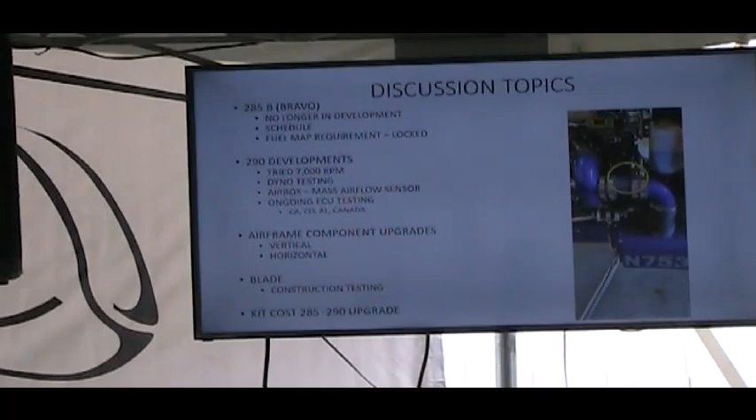Everybody probably knows, but if you're new, the new ECU system has Bluetooth capabilities. So your buddy can sit there and watch all of your flight data on his phone while you're out there screwing around if you want. It's pretty cool, the stuff it's capable of doing. And it has a total of, I'm always forgetting, about 20 channels on that. I think it's somewhere around 20, there's 20 capable channels. We don't use all of them now, so if you wanted to add other things, you can actually run those through that ECU.

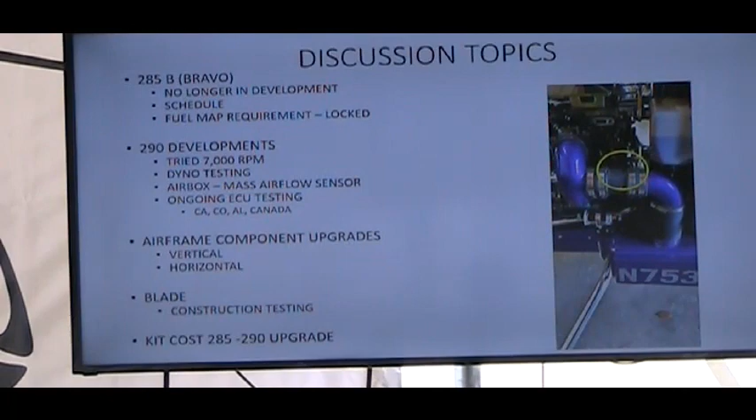For instance, say you want to know what your fuel pressure is all the time. You can put a fuel sensor in there, run it through that ECU system, and it'll come up on your dash panel. So there's several things like that you can add to it and monitor. It has a lot of capabilities, it can do a lot more things than what we're used to seeing.

So I think on that front, that's about all I had to say.

Unless somebody's got any questions, maybe before we move on, if anybody's got questions on the 285, 290, we can handle it while we're here. The next question would be, what would it cost to bring a plane down here and have it upgraded? We talked about this and decided nobody's going to ask that question. So we just... and then Chip showed up.

No, we are working on that, we don't have a hard number, right? Correct, because all the wiring has to change, you know. So there's a fair amount involved there. The engine doesn't necessarily have to come off the aircraft to do it, although sometimes it's easier to pull the flywheel off and put that stuff back together. And it's not hard to get the engine off anyway, so it's not a big deal. But the wiring harnesses do all change.

If you have the blaze gauges, that's great because you don't have to change those harnesses from there back. But if you've got the monochrome, then we've got to go in there and change things. If you want to read the ECU, we'd have to go in and change all of them. But if you want to stick with monochrome, we can stick with that harness, but we've got to run two harnesses now to collect that data.

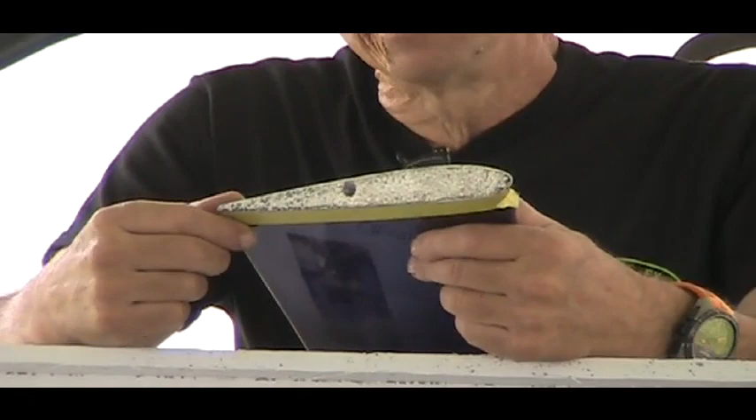So we changed the way the coring is, and I'm going to show you why I'm really glad we did. The coring always worked well, it has worked well, but if you have a mishap with your machine and you have the old style with the coring in it, if that blade takes a substantial hit and it doesn't fracture the outside, most guys are going to assume, well, it's fine.

This came off of Mike's bird. Yeah, the other half's down there. And the wing actually took a hit. It wasn't a crash, he dropped his tail boom or something, it came off the stand. He dropped it, and it didn't crack, so he had no reason to think there was anything wrong with it.

Well, then he shows up the other day and he takes off, and a couple of us notice that his wing is back there doing this. And we're like, holy cow, that thing looks like it's broke. So we have him land and go look at it. There's no cracks in it. But what happened is, because it had a hard hit, it actually sheared and separated the coring.

So that wing was actually hanging on by just this skin layer. It's just a matter of time before it was going to fatigue, and it's going to get sucked into the tail rotor, and I don't think I have to elaborate on what's going to go on then, right?

So the good news is we don't use these anymore. Because we developed our own system, you don't have this issue. And again, I got to say, if you have one of the old ones, don't freak out. It's fine. But if there is a mishap, if somebody walks into that thing and hits it hard, really do a good inspection on it, because that's what could happen.

How would you know if there was no crack? Well, you can grab the wing and move it, and it should be solid. You can see this inner skin buckling, and you can also hear it if it's separated. Tap tested all the way down, and it sounds hollow. So this thing actually sheared along the side and went through the coring as well.

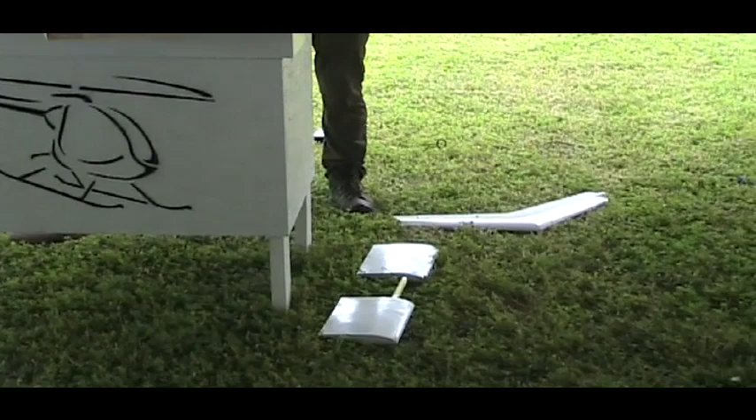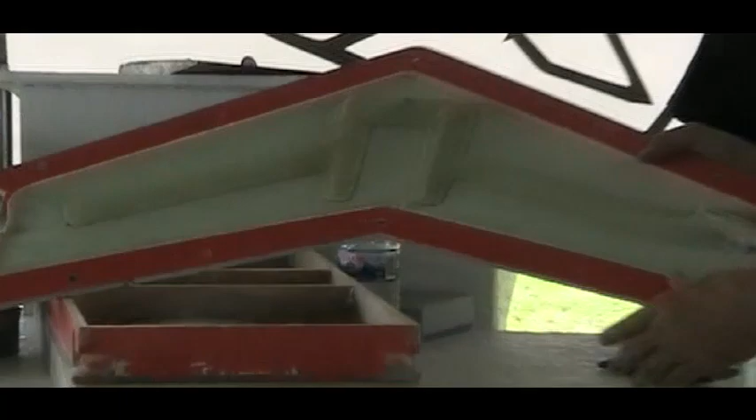But the way they're done is, I don't know if you can see that or not, but they have an inner webbing in them, kind of like a spar and ribs. And it's hollow fiberglass. It's all fiberglass.

And they are methacrylated together, just like your entire airframe is. Methacrylate has a shear strength of 3,500 psi, which is going to be way higher than this, right? That's the same thing the entire airframe is bonded together with. So if you were to get a new one, or you have a new machine coming,

this is what you're going to get, right? It actually comes out a few ounces lighter than this, so there's a plus side to that as well. Because every bit of weight you put on the tail, you have to counter in the front somehow with a sash weight or something like that.

So that is the only new thing as far as airframe components go on the bird, and everything coming out of here from now on will be that way. If you find one that you're questionable and you're not sure, you can always take it off and send it down and we'll check it. But if you know it's bad and you reorder one, that's what you're going to get. You're not going to get these anymore.

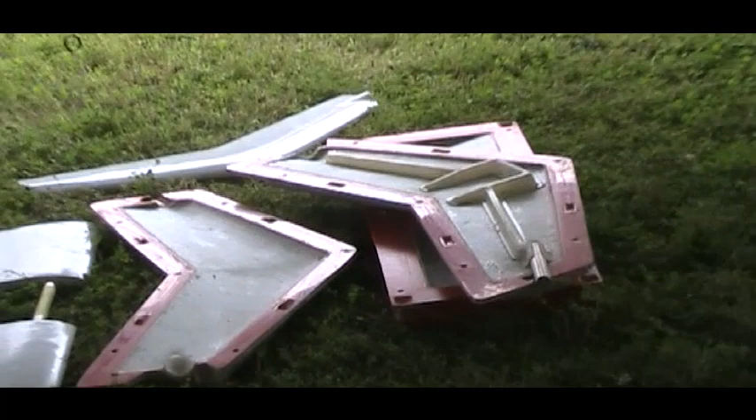So even if they somehow come back to life, I don't think we're going to buy from them, because now we know it's a much safer scenario than what we have.

So I just wanted to brush on the new blades. Everybody's always asking about the blades, but over the course of the past year, I would always say, I think we've mastered it, we've slayed that dragon. Then something would happen and I'm like, oh my God, yeah. And it's happened like 5 or 6 times. But this time, I truly believe we have slayed the dragon.

But we have made multiple blades, and they all come out the exact same every time. So I'm not going to go through all the woes, but when it comes to aluminum construction in the bonded aluminum, nothing wants to stick to aluminum. It's just the nature of the material. So in order to get anything, even paint doesn't want to stick.

I don't know if you may have in your past tried to spray paint a piece of aluminum, looks really great, and you look at it 6 months later, it's always flaking and coming off, because nothing wants to stick to it. So you actually have to treat the aluminum, you have to etch it, acid it, do several processes to it in order to get something to stick.

Not only do you do those processes, but if you do those processes and the timing is not right, it's like you didn't do them at all either, it turns out.

So we have been in a huge learning curve, but we have pretty much pinned that down where we can repeatedly do that thing over and over again. And I'll give you, I mean, we probably did way more than we needed to do, but because of where we use it, we want to be more sure.

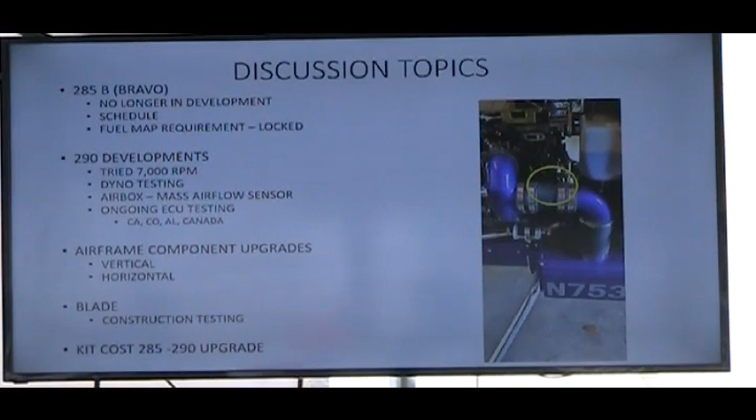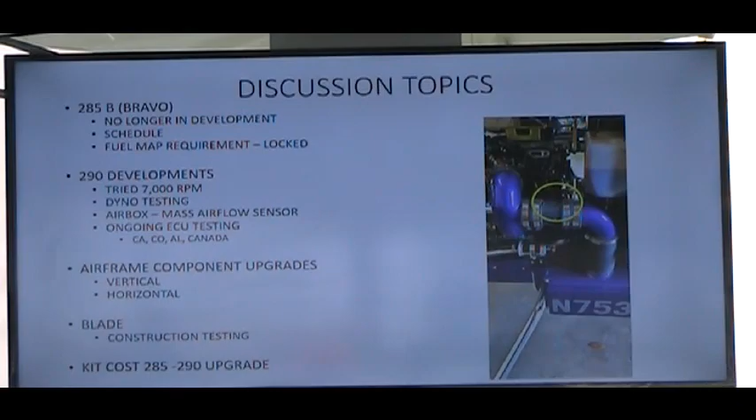It's better for flying in weather. Most of those upgrades were done because of the UAVs - those guys are going to fly through weather. Most manned guys, if it's raining or snowing heavy, you're usually going to land, but these guys are flying through it. So we needed to protect the induction system and all that.

So if you have ideas of changing the shape of any of that stuff, I would caution you, because if you change that stuff, it changes the way the motor runs. The 2 strokes, it's all about airflow. And if you change sizes and shapes and add turns and stuff to exhaust or intake, you've changed everything.

So if you use what we send you, it's going to work fine because we've done all that work already. But if you think you're going to change it, I'm not saying you can't - it's your helicopter, you can do anything you want with it. But just be aware, you might fire it up and not have enough power to get off the ground because you've just changed the airflow on it. So everything else has to change.

And it's a long process. Unless you've got a dyno in your backyard and you want to go through all the stuff we did and spend tens of thousands of dollars, have at it - and just allow us to steal your ideas when you're done.

Muffler development. The exhaust system on the 290 is new. Looking at it, you probably can't tell a whole lot of difference, but it is new. The old manufacturer - I don't know what it is about these old guys, they just want to retire - and all of a sudden we can't get stuff, so we explored the idea of doing our own. We're still kind of talking it over, but this fellow in the blue shirt right back here, I'm going to embarrass him - he works for the company that was brave enough to tackle developing a new exhaust system for us.

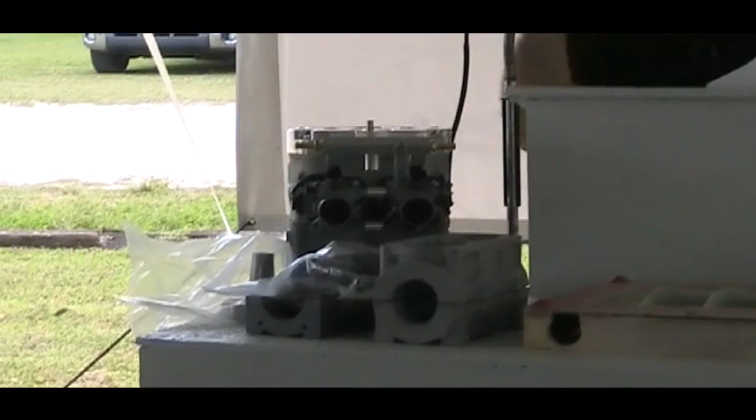Matthew's going to go first because that's his slide. Oh, Matthew? Okay, reverse that then. You're talking with the two though, right? You're talking about here, yeah. Well, and the other thing they're going to talk about is the 2.0 upgrades we're going to do on the electric bird, some changes we're making there as well. Before you get started, turn that mic that way, you're getting the ringing.

Is it next slide? Have the next slide, Mike. Oh, now you want. This is a commercial break.

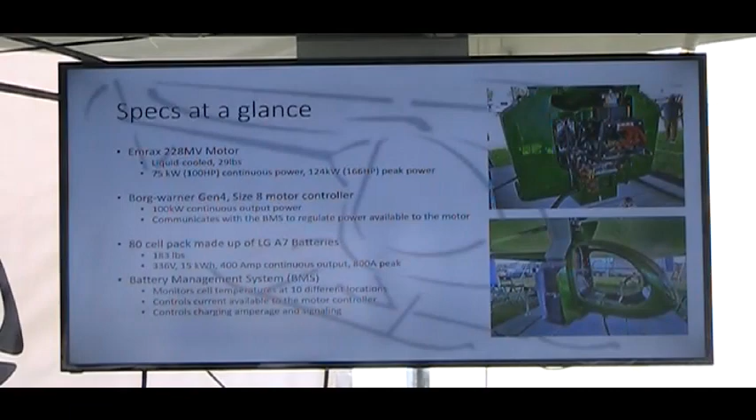Hey all, so basically I'm just going to do a quick overview of the specifications of the electric bird before we talk about some of the changes we're making to it. I think you guys have all seen it out there, but it's got an Emrax motor on it, a company out of Slovenia. It's a 29-pound motor, rated for about 100 horsepower continuous, 166 horsepower peak. We're not using that much, we're using about 60 horsepower to get it off the ground. The whole bird's about 460 pounds. Our motor controller is made by Borg Warner, that's the big old box you see sitting underneath the motor, which is also bigger than the motor itself.

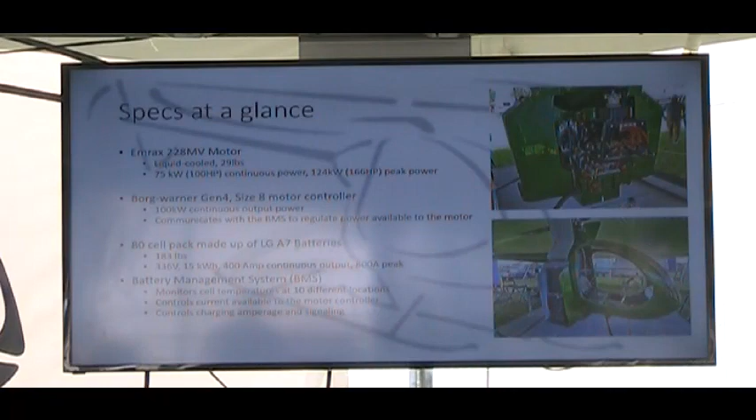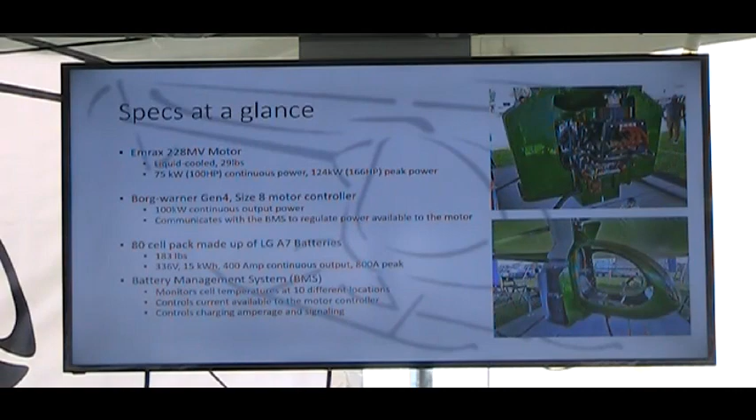That controller will do 100 kilowatts continuous, and it's in charge of the speed control for the motor because it's totally speed governed—there's no throttle or anything on it. It also talks to our battery management system to make sure it's not drawing too much from the batteries. For our cell pack, it's an 80-cell pack, LG Chem cells out of an automotive application. About a 183-pound pack, 336 volts fully charged, about 45 amp hours, so that's 15 kilowatt hours. They'll put out 400 amps continuous, 800 peak. That gives us about 25 minutes of hovering time, and it's unknown what it'll be in forward flight, but we're expecting around 35 minutes, and we'll see.

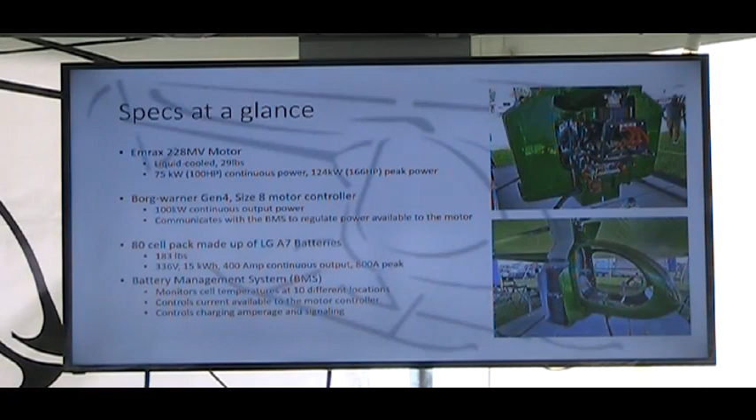Daniel's going to talk about why we haven't done that yet. In terms of charging it, if you had a good enough charger, you could charge it from 0% in about half an hour, charging at about 70 amps, which is what it can charge at. Our battery management system, the little box sitting to the right of the seat, measures the temperature of the cells and uses those temperatures along with a current sensor to make sure we're not overheating the battery pack, and keeps all the cell voltages somewhat close, which is important for safety and longevity of the pack.

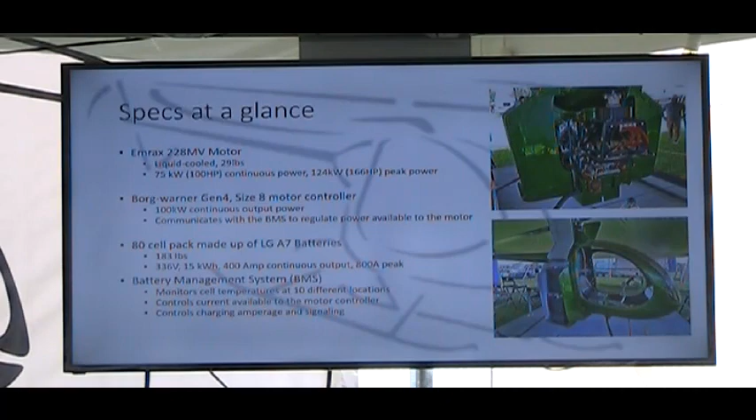So yeah, that's pretty much an overview of it. Daniel's going to talk about a couple of the changes we're making to it to make sure we can actually realize that 25 minutes in flight. Basically right now we're running that motor 1-to-1 with the tail rotor, so we're running it at 2750 RPM. The issue with that is it's too much torque for that motor. As you know, horsepower is related to torque and speed.

So currently at 1-to-1, the motor gets hot, it doesn't overheat, but mainly it's actually the motor controller. In about 5 minutes, because the motor controller is air cooled, it will start to cut back.

One of the ways we can change that is by increasing the speed of the motor. So when we do that, it's going to be the same amount of power at the shaft, but less torque, so less amps. That's going to keep the motor controller a lot happier and in a range it's continuously rated for. That's going to require changes to the mounting, putting basically a sprocket reduction on that.

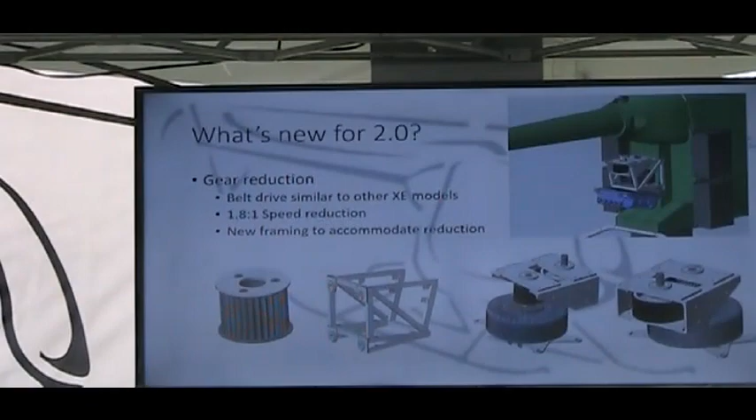Daniel's going to talk about that and some of the modeling for that. So on the 2.0 XE, we are doing a 1.8 to 1 speed reduction from the motor to the output shaft, using a 30-tooth drive sprocket and a 54-tooth driven sprocket. We had to move some stuff around in the mounting at the rear of the helicopter, so the motor controller is now going to be sitting underneath the frame that holds the motor and the reduction assembly.

The reduction assembly is similar to what's on the XEs. There's a couple of things that are repositioned, made a little larger, made a little smaller, and then new framing to accommodate all those changes. That's going to start manufacturing this week, so we're excited for that.

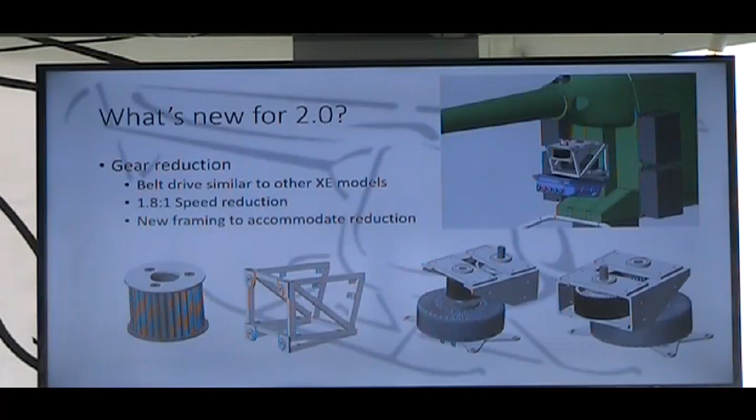Now I'm going to give you a quick overview on the gasoline motor that we've been developing. I did a higher level talk about it last fly-in, so I'm just going to glance through some of those same slides and then give you an update.

So why are we making this engine? I'm sure you guys that fly these know that the MZ202 engine has some issues, and it leads to a fairly low time before overhaul. The manufacturing also got moved over to China on those, and you can have your hesitancies about that. We still like having that model below the 290 and the XET, so if those engines are iffy and we want to have that model, we need an engine that meets that need. We also like to bring some components in-house because it's good to have control of your own supply chain.

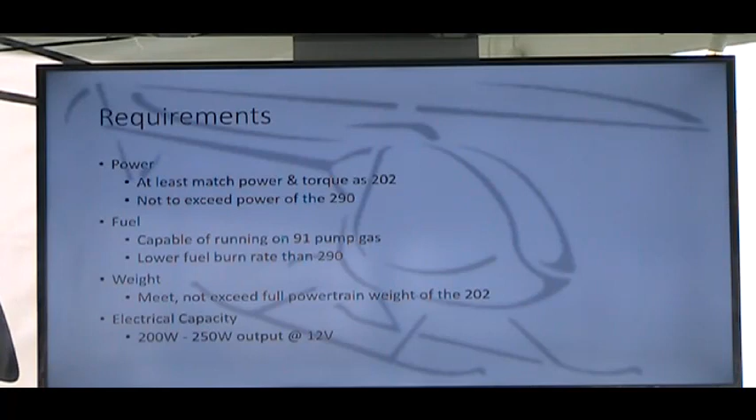We're good for the next one, Mike. So our requirements for this engine were to at least match the power and torque of the MZ202, but not really exceed the power of the 290. We'd like to run it on 91 octane or 93 octane pump gas with a lower fuel burn rate than the 290. The weight of the whole powertrain isn't going to exceed the weight of the 202, and our stator capacity is going to be 200 to 250 watts at 12 volts, so roughly 20 amps.

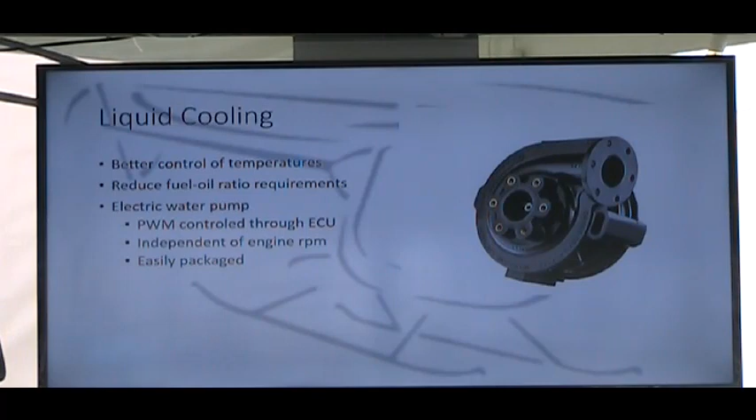Just an overview of the general systems relating to the engine. It's going to be liquid cooled, using a PWM controlled water pump, meaning an electrically driven water pump. We like this because we can operate it independently of engine RPM — if you need lots of cooling capacity, run it at full tilt, if you don't, then don't. It's also easier to package; we don't have to accommodate for it on our actual block design, we can put it where it needs to be on the engine.

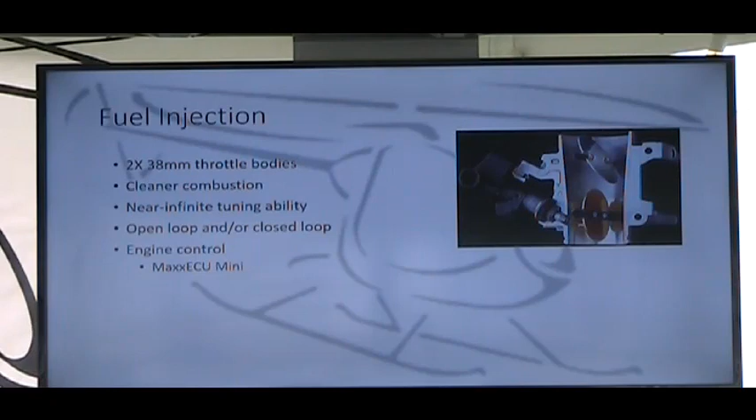It's going to be fuel injected with two 38mm throttle bodies. We like fuel injection because you can get cleaner combustion and you don't have to be an expert on carburetor tuning to get your bird up in the air. Tuning is near infinite — we can do open loop or closed loop, and it's going to work with our existing MaxxECU systems. It's going to be electrically started, as all of our other engines are.

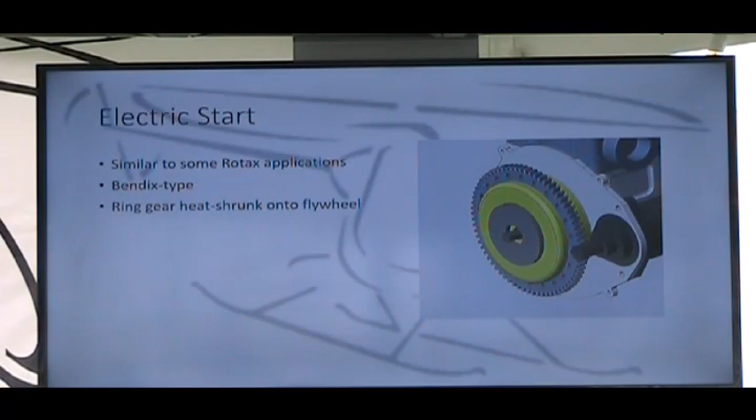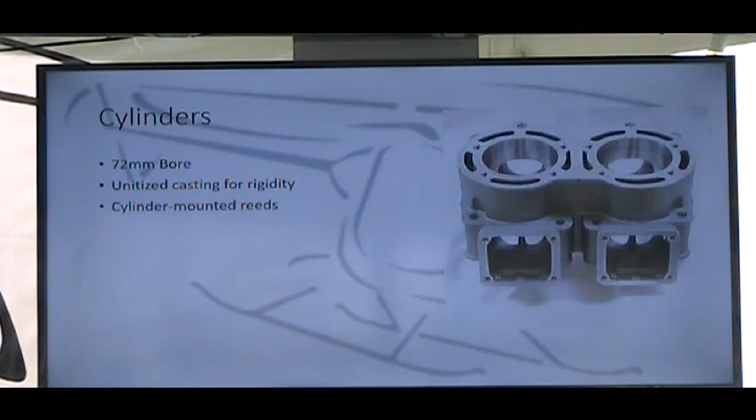It's a Bendix type starter with a ring gear placed onto the flywheel, heat shrunk on. Cylinders are a unitized casting, 72mm bore. The reeds are on the cylinders, and it's liquid cooled throughout the whole cylinder block.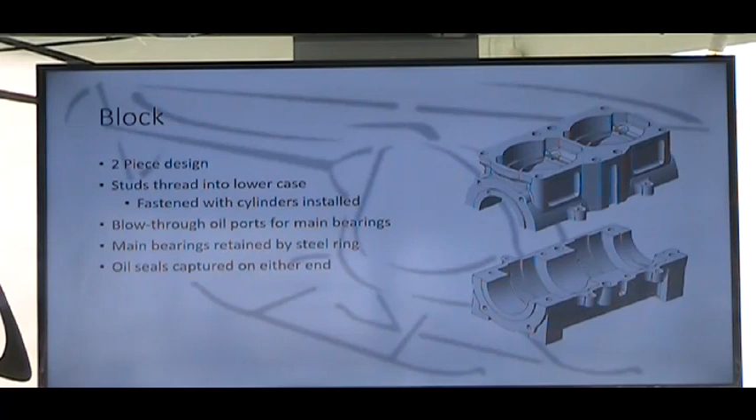The block itself is a two-piece design. The studs for it thread into the lower case, go through the top case, and then you fasten the cylinders onto those. There are blow-through oil ports for the main bearings — instead of relying on your main bearings to be splash lubricated or just seeing the air-fuel mixture go by them, we're actually forcing a little bit of that mixture through them, which should reduce wear on those. The main bearings are going to be retained by a steel ring, so your crank can't walk, and the oil seals are going to be captured on either end by plates, so you don't have to worry about seals blowing out.

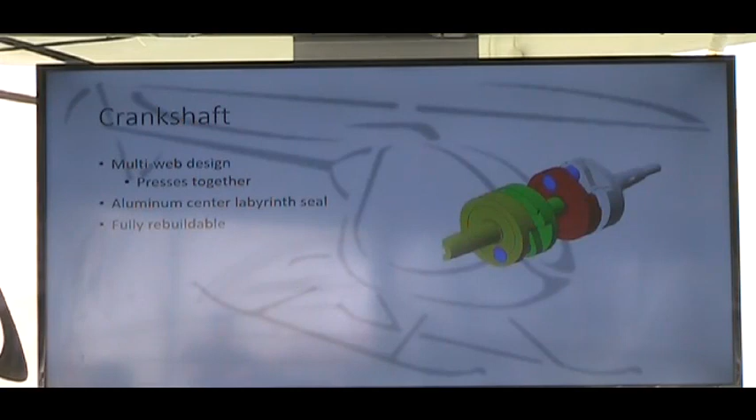Crankshaft is a fairly typical multi-web design that just presses together, that's pretty common in power sports. The center labyrinth is aluminum and it is fully rebuildable. Some renders of the prototype assembly there, and you see the actual parts up here on the bench.

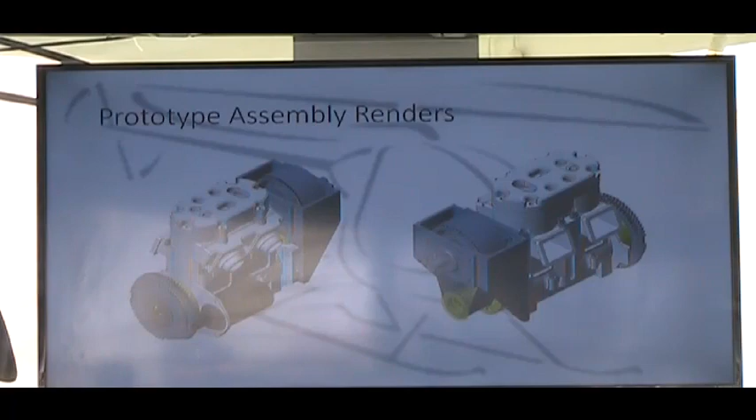Project status: we are getting ready to line bore the block and do some final machining on the ends of it. Then we're going to send one of our crankshaft webs out to be hardened and have a hole poked in it, and then we can press that together with the rest of our crankshaft. I'm hoping in 2 months we're going to be burning gas on this.

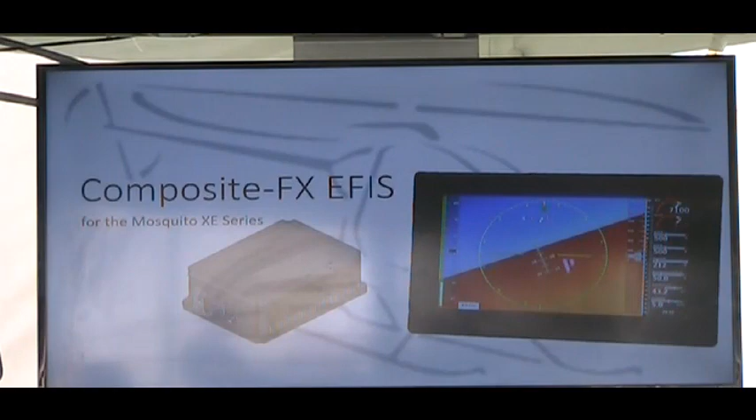I'll keep this pretty quick because most of it's just a rehash of what I said last fly-in, but we are currently designing an EFIS platform for any of our mosquitoes. I guess I'll go over some quick specs.

You may have already seen it in the black test bed out there, but it's got an 8-inch sunlight-readable touchscreen that's totally waterproof. Internal to that, our little box we have right here - this is the actual box that sits underneath the seat. The thing up there on the dash is just the monitor, but it's got a 9 degrees of freedom inertial measurement unit in it, and a barometer built in for altimeters.

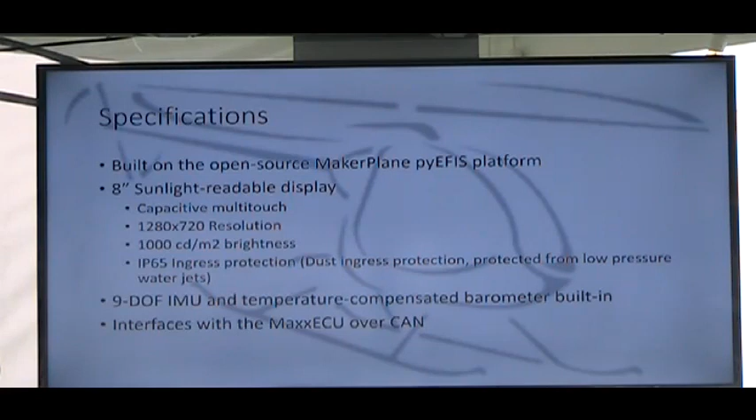Currently it talks entirely over the CAN bus to the MaxxECU. It can also talk to the MGL RDAC, so this would work for the turbines and the 202 models.

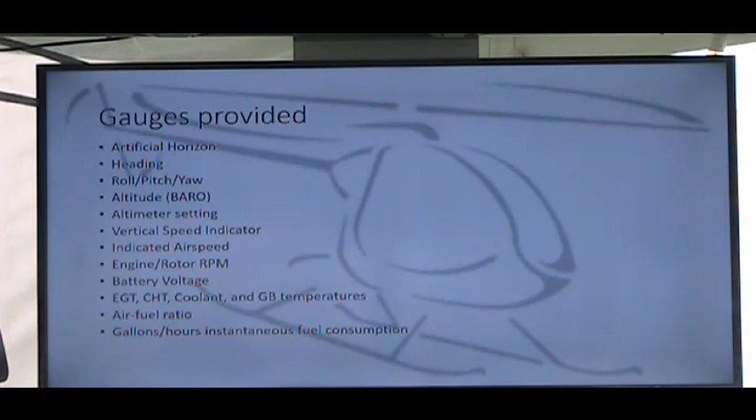Just a quick overview of all the gauges provided, but generally, if the ECU is reading it, you can display it. I've set it up so that it's totally configurable on what gauges you want, and as you build your helicopter and spec, if you want fuel pressure and all that, I can actually go ahead and set up the screens for you guys while you're doing that. So it's very, very customizable.

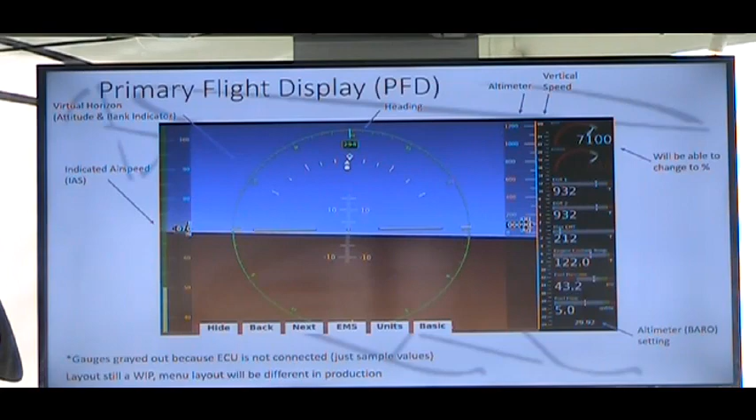I'm going to skip over these, but this has gone through a lot of changes. The Virtual Horizon is a lot smaller there, and in some pages it's actually gone entirely. But this is just to give you an idea of what the gauges are going to look like. For example, I've actually combined the rotor and engine RPM gauges together, kind of like a helicopter style, so that you don't have to look at two gauges at the same time.

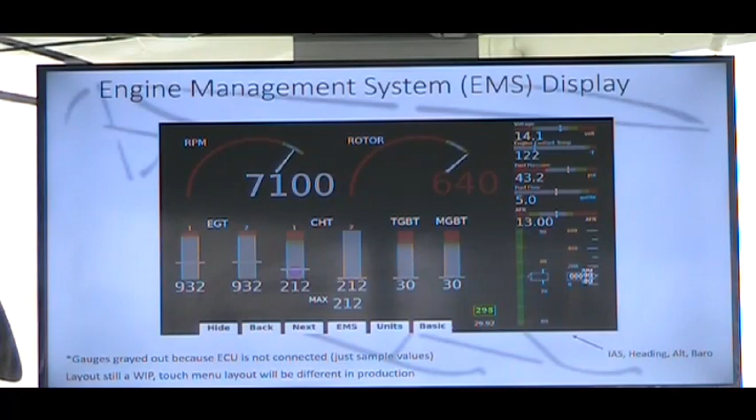But it's fully configurable. You can see all your EGTs, your gearbox temperatures, RPM percentage or raw values, airspeed, altimeter, the Virtual Horizon if you want it. Found out later that most people don't need that, which makes sense, but just a nice thing to have, I thought. Basically when you order one, we can go through and set it up to look just how you like - any gauges you want, you can put on there.

Totally customizable. It could be customized by the end user, although it's generally not easy if you haven't got any experience working with Linux systems or Qt widgets. But the point is, it is customizable.

So who would want this? In terms of the price point, it's going to be cheaper than the 3-pack of MGL gauges, so it's going to be cheaper than $1,200, but at the same time you're getting a lot more functionality for that, and it's going to be tailored just to your bird as well, so it's nice in that regard.

Things that why you might not want it - there's not going to be any maps, no ADS-B support built in, transponder, radio, any of that stuff. You want to go for a full MGL setup then, but this comes in at around $1,000 as opposed to like $7,000 for the whole MGL setup there.

Plus we make it here and it's customized for you. I don't have any demos here right now, but we could look at it on the Blackbird later if anyone's interested in that, so I can show you it actually working and stuff. I think that's all I had to say about it.